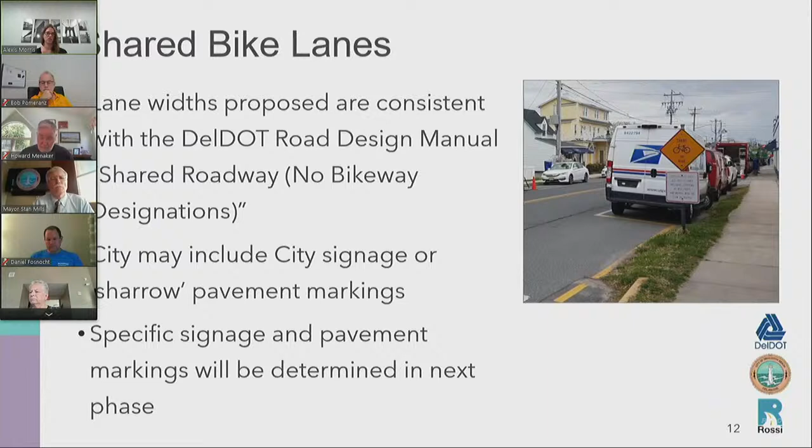The other recommendation we heard from the task force was for a tapered travel lane within the first block of Baltimore and Wilmington Avenue. We spoke with the project team about this, and it seemed the focus was really to increase views of the boardwalk and the beach. But tapered travel lanes would be in conflict with our goal to widen the walkways.

And then using turn lanes selectively - so our concept provides turn lanes where they exist today: southbound North 1st Street, northbound South 1st Street, and northbound South 2nd Street.

And then the treatment of the street ends. We had discussed previously a limited vehicle access zone or a pedestrian plaza, and really siting that within this area is a bit of a challenge. So what we considered was the existing and planned usage, as well as access requirements - so where parking lots and parking garages are - to determine feasibility and location for a limited access zone or pedestrian plaza. We'll talk about that in detail with our concept.

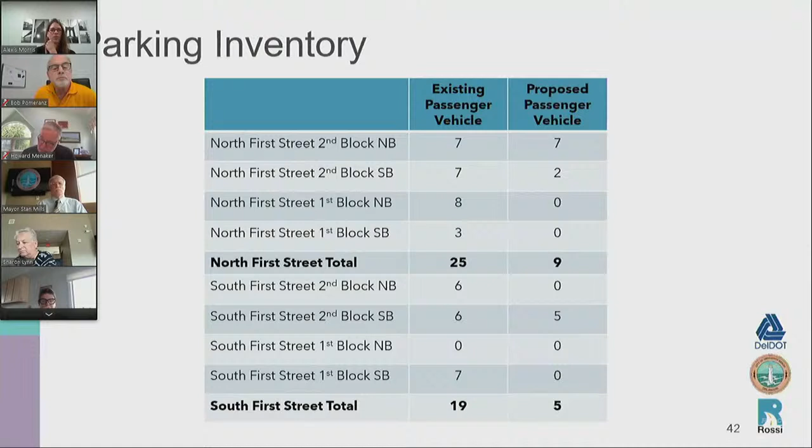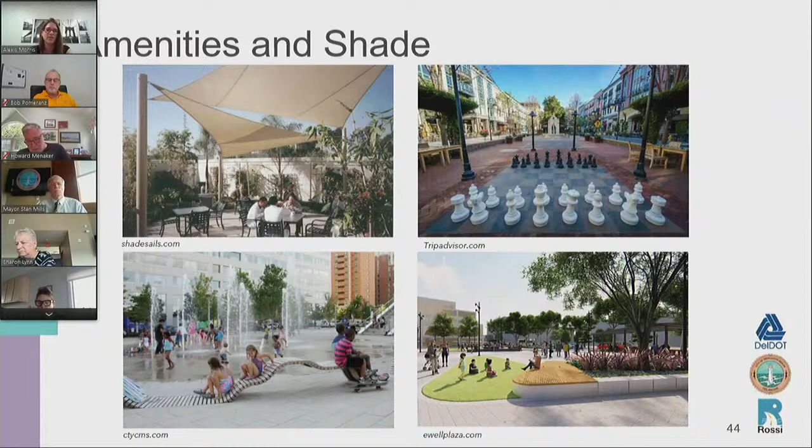Some photos I've shown here are really just provided for inspiration, if that's the direction the task force wanted to go in, if that's the direction the city wanted to go in. And then some vertical elements, whether they're tall features that can be seen from a number of blocks away, or smaller, understated features that still become iconic, known to Rehoboth—maybe everybody who visits wants to take a picture next to this memorial, whatever that might be.

So our next steps. Basically, this is our draft concept. We want to go ahead and get your feedback, and feedback from the city of Rehoboth to further refine this concept. Our next step will also include cost estimating and phasing, and then we would propose presenting that concept at a public meeting or workshop in September.

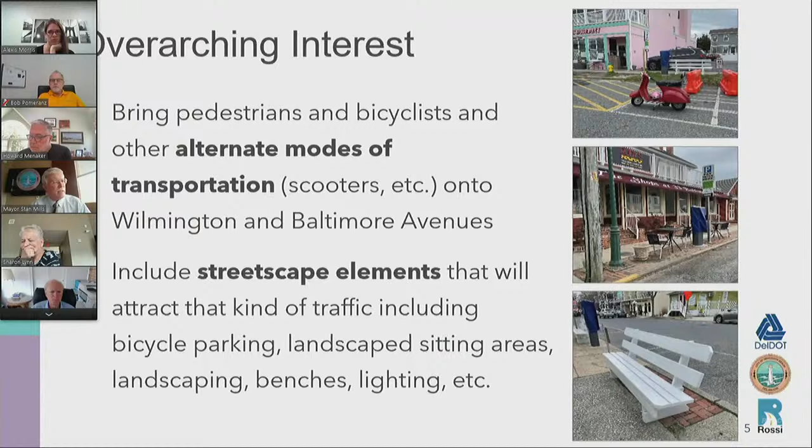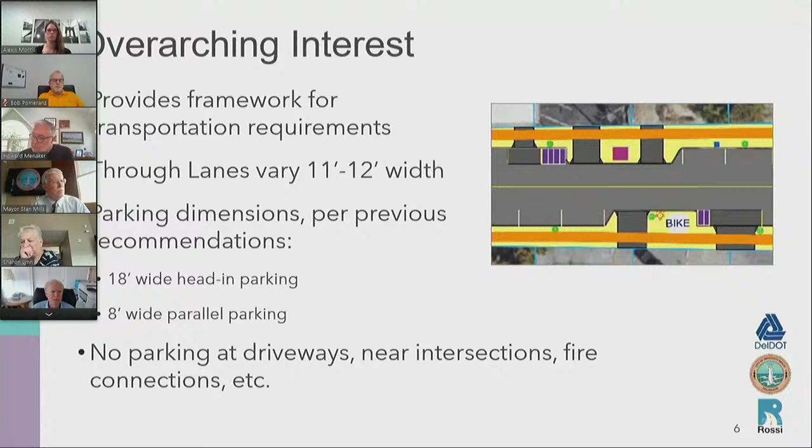All right, any questions? Hearing none, we'll go to the next slide. Any questions? I'm going to do this fairly fast, so make sure you speak up. Next slide, next slide. Overarching interest, this course mimics our guidelines. Next slide, overarching interest, again mirrors our guidelines.

Next one. PCP, I think, is also phencyclidine, hallucinogenic, but here it's pedestrian circulation path. I did want to further define building frontage. Help clarify for me, is building frontage only private property? Or can it also be a combination of private property and city property? Absolutely, it can be. So the building frontage zone, that's really just that space within which things might be set, but nearer the building side than the buffer side and outside of the pedestrian access route.

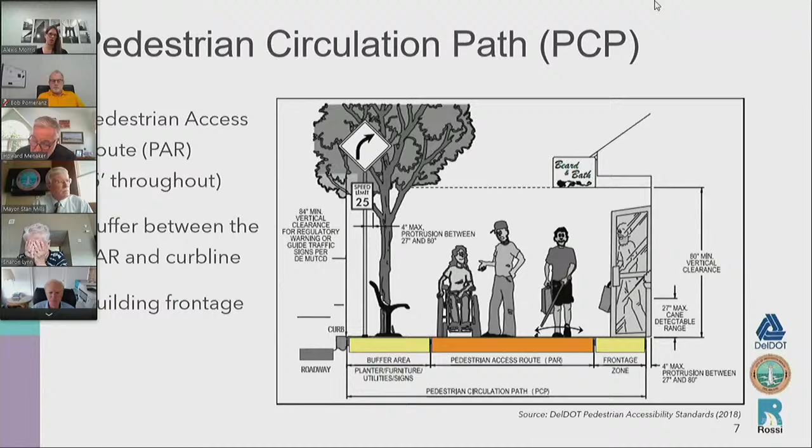That pedestrian access route, I think it's demonstrated a little bit better on our next slide. So the building frontage is that immediate space in front of the building. So maybe if the shop here wanted to have a rack with t-shirts for sale or something like that, that would be a feasible and acceptable thing to have in front of the building. But obviously that is outside of a pedestrian access route, essentially where your primary travel lane, for lack of a better term, for pedestrians is.

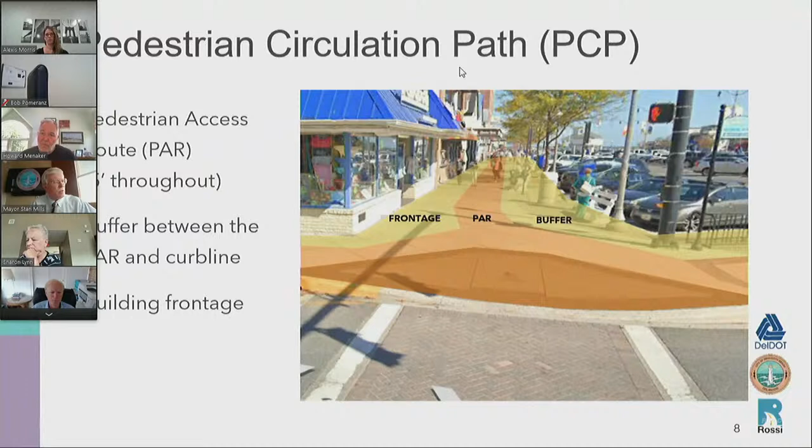So it's really just the area between the front facade of the building and the outer edge of the pedestrian access route, regardless, with no affinity for whether it is private property or public property. Okay, absolutely, all right. Any questions? If not, we'll go to the next slide.

Absolutely, absolutely. So essentially when you're walking on a sidewalk that might be in somewhat disrepair, sometimes you'll see that those slabs don't really connect. One might be sunken down lower than the other one. And that obviously interferes with access for all.

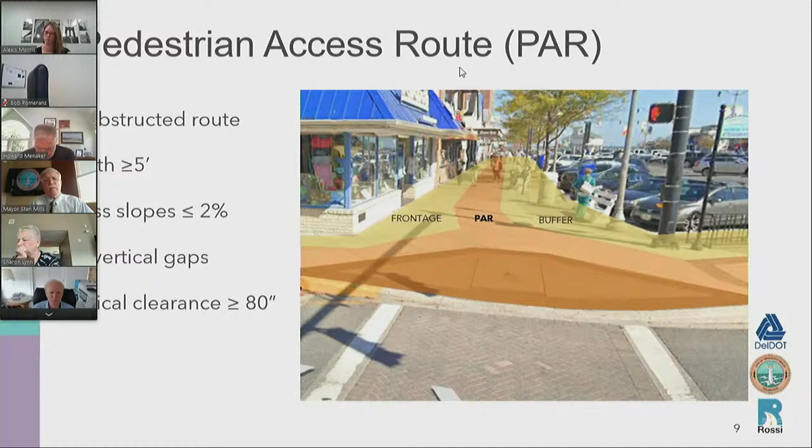Well, that segues into ADA compliance, I believe. Absolutely. Okay, any questions? No, next slide.

PCP elements. I had a question about the last slide shown. Yes, sir, Frank Cooper, go ahead. Frank Cooper, pedestrian access route.

This shows the PAR running into the phone poles, and I think this is interesting because what you've shown later in your proposal eliminates that problem, does it not? Isn't that the goal of removing that parking? Because the fact is there isn't enough room on this street for a PAR at all. It literally goes away. So I just thought it interesting to note the reality that the building access area on this street is...

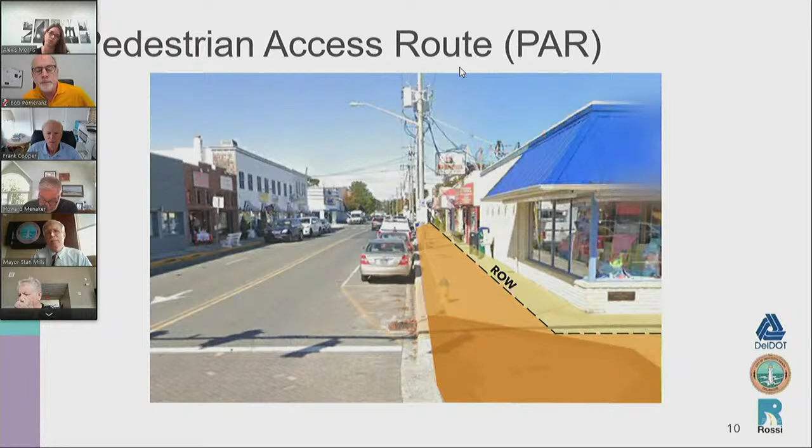...private property and could go away, as Ed Zanowski pointed out, since they could actually build out to that. So if we don't allow for it now, that could go away and we could end up with virtually no sidewalk if we don't address this. Thank you, Frank. Absolutely, and thanks for pointing that out. I think that's what we were trying to demonstrate with this image here. That's a good slide also, just to reinforce our desire to underground. Thank you, Frank. Next slide, PCP elements.

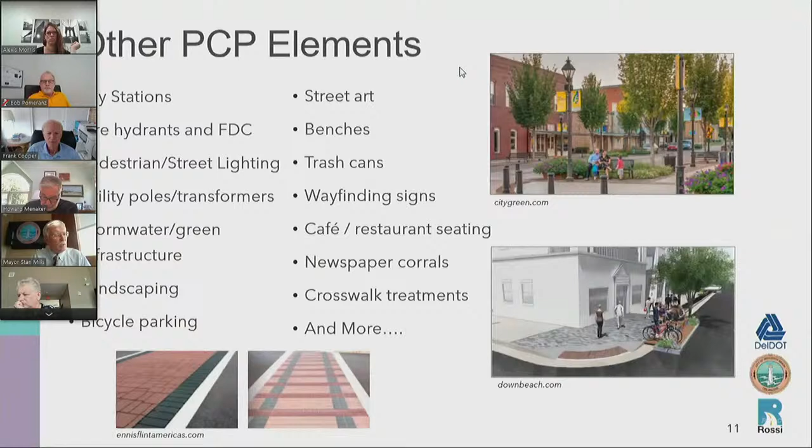The next slide is tapered lanes. I certainly have an opinion on that, and we voted to do that, but I think we'll address our thoughts on that again at the next meeting. That's the tapered travel lane. Are there any further questions here?

I made a note in my individual notes, and I said, wow, look at the number of aprons and driveways there. Yeah, they consume a lot of space, and that's just a statement. Any questions?

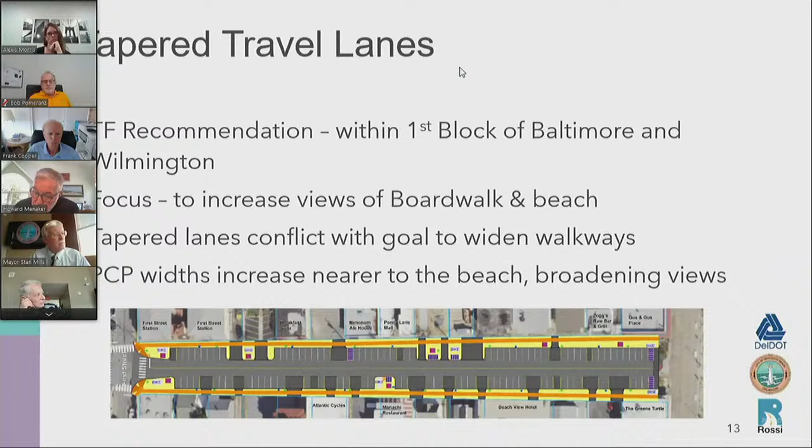All righty, U-turn lanes. Well, we went through that. This is exactly from our guidelines. Next slide, treatment of street ends.

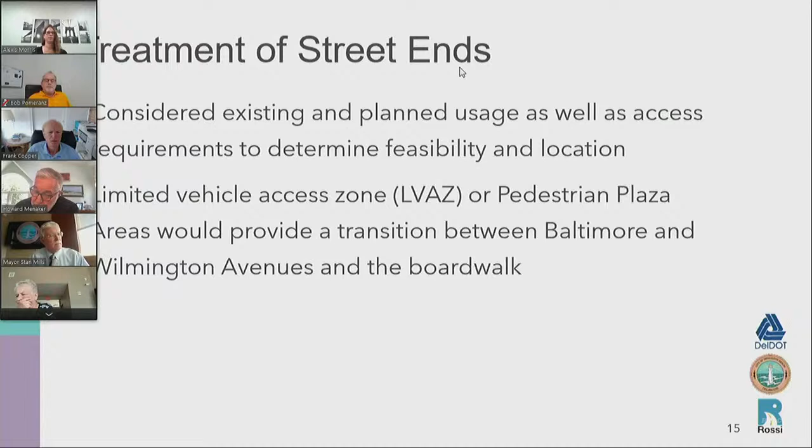Next slide, need for delivery and emergency vehicle access. I really don't have a question. I have a statement, maybe more, I don't know when it's appropriate, but...

...after the Lake Avenue Streetscape project, I am very leery of turn radiuses and using engineering programs to determine turning radiuses. Up in the Lake Avenue phase 2 project, we did that and actually had to take one curve out because it was not an adequate turning radius. So when we take this up at the next meeting, I'll probably bring that up and question it.

Are there any questions for this one? Yeah, Mayor? Frank Cooper. Yes, sir, Frank. Yeah, I question this too. I'm certainly in favor of the bike parking and whatnot, but I had a question about what is the minimum. In a practical sense, Mayor, you mentioned you had to take one out. I don't know what the federal standards or state standards are, but what has the city found? What did your people find was the minimum acceptable when you ran into problems before?

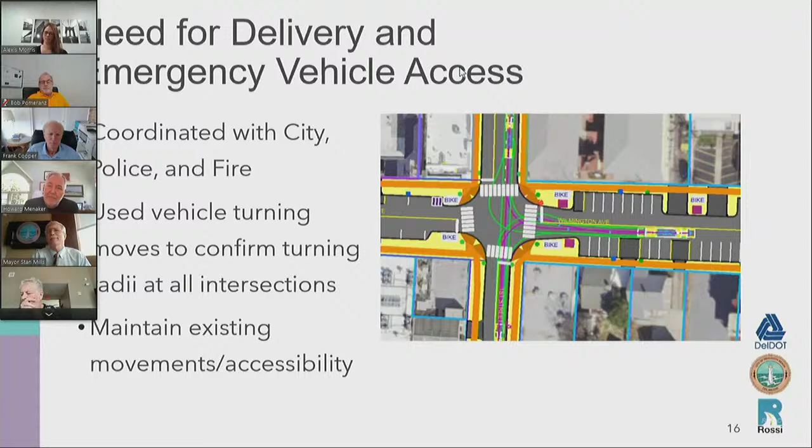The next slide is parking. Are there any questions? If not, we'll go to the next slide, South 2nd Street parking.

Okay, can I ask one thing about the last parking thing there? Yes. I had a question about scooter parking, just because of the shape of scooter parking areas. Is it acceptable to put those alongside restricted areas? In other words, areas in front of, say, a fire hydrant, marked off with yellow lines. Is it acceptable to use those as access to scooter parking so you could have scooters in, let's say, an angled parking space one alongside each other, four deep, and then use that same space allotted for no parking in front of the fire hydrant to be accessed?

Is that legal? Is that doable, Alexis? What we'll do, Frank, is Chief Banks here is making a note of all your questions and everything, and we'll address that as a bullet point at our next meeting also. Okay, thank you. Thank you. Anybody else? We'll go to the next slide.

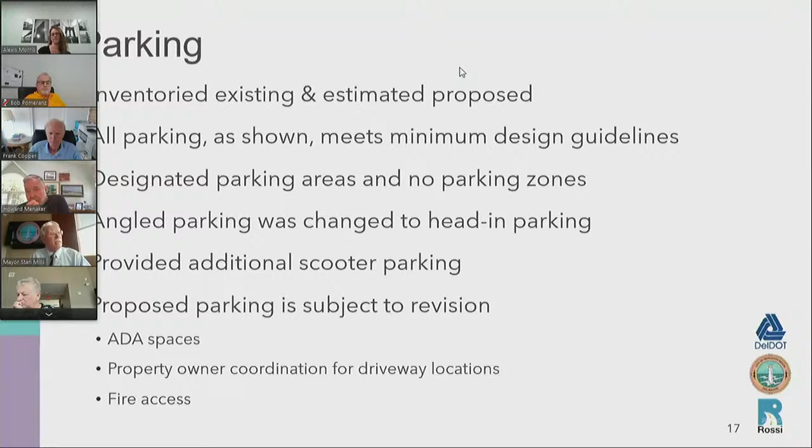South 2nd Street parking. I'd just like to double check what is the meaning of a striped shoulder. In other words, it's not a designated travel lane. It's not designated as a turn lane. It's a no man's land, which can be converted to a turn lane, can be converted to a travel lane, can be converted to parking, question mark? Yeah. Correct. Correct. Okay. Very good. Any other questions on this slide?

Yes, Frank Cooper. Alexis, when we were talking about this slide, she said, I'm paraphrasing, that as far as adding the parking spaces, there were no other parking spaces adjacent to this. Is that what you were saying? I can see the way this picture is that there are none, but prior to that, there are parking spaces, are there not, in the previous block heading south?

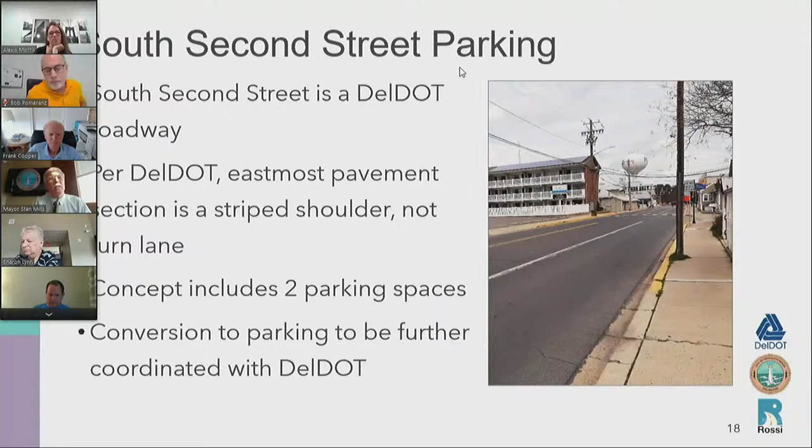Frank, hold on to that thought, because further down in here, there's actually aerials or diagrams of those blocks. So bring that up again, if you would. Any other questions on this particular slide? We'll go to the utility undergrounding. Let's pause for just a minute. Kevin Williams, would you be able to give us a quick status report? If everybody recalls, we've hired JMT, I think, as our expert consultant with undergrounding. You're working with them, I assume. Yeah, thank you, Mayor.

Yes, we actually met with representatives from Delmarva Power and JMT last week on site. They walked the complete site, all 4 streets, to get a feel for what would need to be done. JMT was able to get input from Delmarva on where tie-ins would need to go, that kind of thing. So they're in the data collection mode at this point. I think they're due to come back in 3 or 4 months with the report.

So what is their partnership with Rossi? Rossi, we know, is not really getting into the undergrounding other than the minimal information they're providing here and some guesstimates of locations of transformers. Is JMT eventually going to partner with Rossi, or are they just going to do their own thing? At this point, I think they're just doing their own thing. It's not in their scope right now to coordinate with JMT, although they have some history together. They have spoken as to what each are doing, but it's not in their scope right now to do any direct coordination. All right.

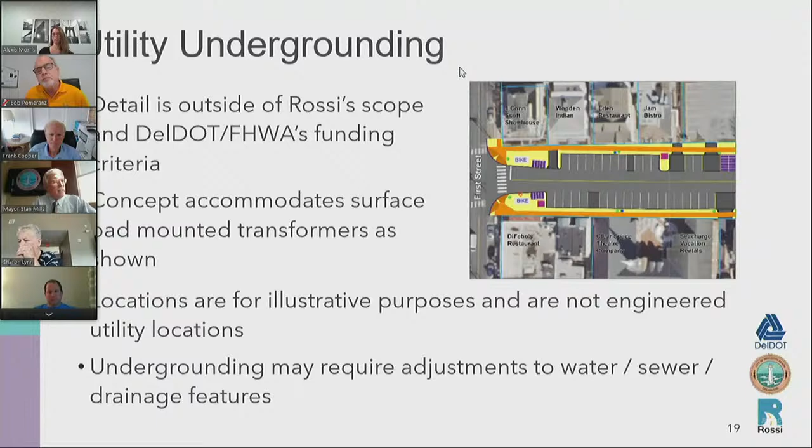Thank you, Kevin. So the point is for us, Rossi's trying to give us some ideas, but the definitive ideas on undergrounding will come from JMT at a future point. Are there any other questions on utility undergrounding? If not, we'll go to the next slide. Stormwater management. I think, Joe Baker, you were mentioning the flooding incidents at your place.

We're going to need to meet with you, and frankly, I think we're going to have to reach out to all the businesses in our project area to advise us if they have any flooding incidents that we need to be aware of, because we're out there, but we're not necessarily cognizant of every situation where it's flooding. So we'll reach out somehow to everybody. Yeah, that sounds great. Thank you.

I had a question. What are tree pits? Tree pits are just those areas where you have trees planted within the pedestrian circulation path, for lack of a better term. Okay. Are they lined pits designed to retain the tree roots so that they don't upheave the sidewalks? There's different ways of doing it, and that would have to be a consideration in final design. Good. Thank you.

Frank, you all right? Yeah, that's what I was wondering. I had talked to a landscaper about just that, because of the objection some people had about trees elevating the sidewalks and causing disruption, and what the alternatives were. And I was wondering whether these tree pits are in fact that.

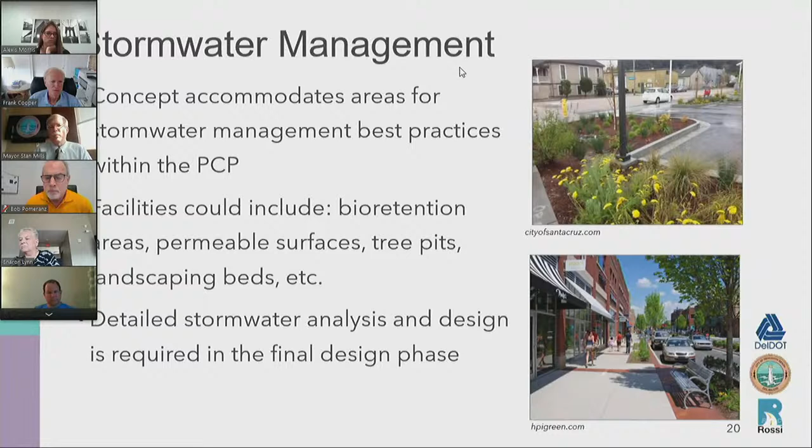So they can be, in other words, is the answer there. Great, thank you. I want to pause just a minute and let members of the public know that after we get through this second set of slide review with our questions, we'll call on the public at that time. So we're not forgetting anybody.

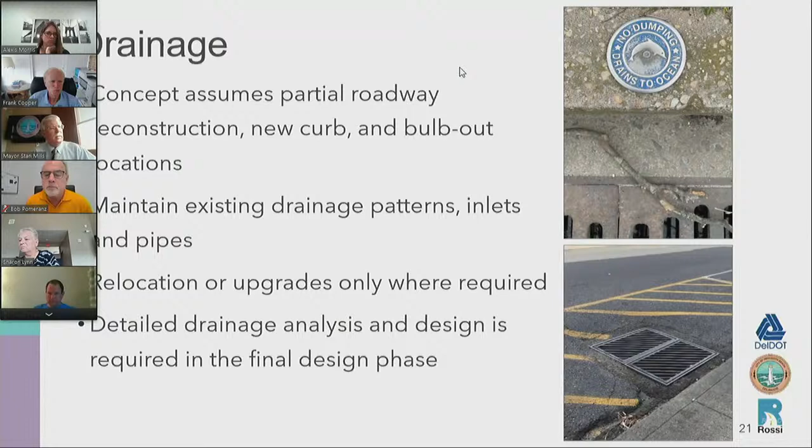Next slide is drainage. I think I already addressed that. Beach patrol and restroom facilities. I think we're pretty close to the point where, Kevin, are they going to do a couple elevations or something? And then we would be able to share those with you all. I think though it's important to address, maybe even right now, that we have an existing restroom building. We have an existing beach patrol building co-located with that. Those are not going away.

What we're planning on doing is renovating them, adding a second floor to it for the beach patrol building. That allows us to expand the first floor restroom facilities for the men's and women. It allows us to expand the first floor area with family restrooms and also changing rooms. We don't have any other way. I mean, the idea would be that if we had city property elsewhere, we could relocate everything and have that entire end of the street open like we do at Wilmington Avenue.

But the reality is we don't do that. We can't do that. We can't buy the Grotto building next door for $3 million and put our restroom facility there and our Beach Patrol there. The Beach Patrol, they're in a strategic location. There are no other locations that can go. So we have to work within what we've got.

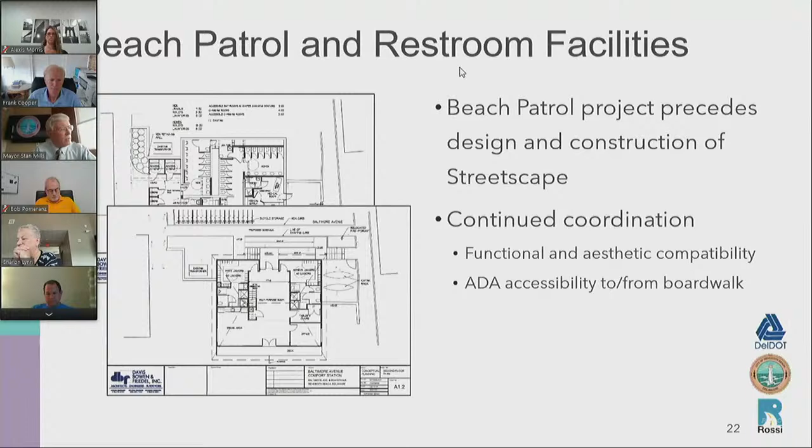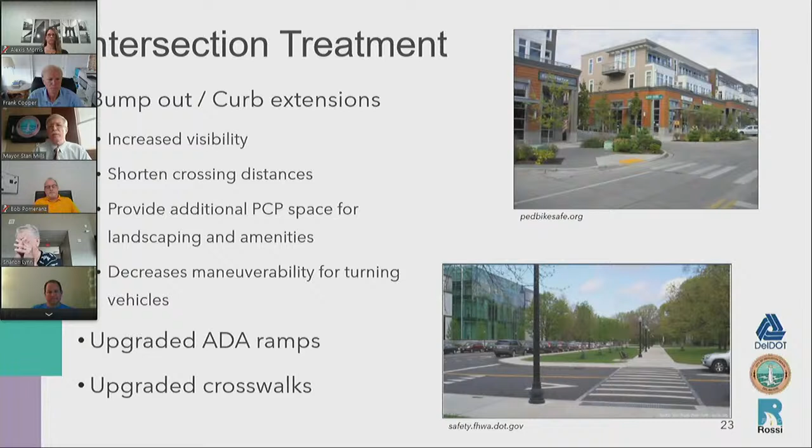Thank you. I think there's time to integrate both projects, Frank and Howard. So, any other questions? Next slide is intersection treatment. Seems self-explanatory. I think there's some discussion points for next week. Any questions? If not, we'll move to the next slide, where we're going to go into concepts. Baltimore, first block.

Does everybody understand the orange line there? That is a minimum 5 foot clear, I'm going to call it sidewalk, if you will, pedestrian access circulation area. And then the yellow identifies areas outside that 5 foot minimum. I just want to make sure everybody understands that concept. And then within the yellow, they're saying that's where you can put amenities or bike racks and everything. I have some comments for it next week, but I understand the concept. Does anybody have questions?

Mr. Mayor, I think the only thing to make sure is clear, in your clarification: the sidewalk itself can extend into the yellow area as well. We are not intending to imply that it is a 5 foot wide sidewalk throughout the project area, but rather that sidewalk can be variable within the yellow area. It's just the orange is its minimum. And again, that alignment too can shift left or right, depending on whether Amuse would prefer to have a little additional space in front of that area, if that's a desirable space, or some other suggestions such as that.

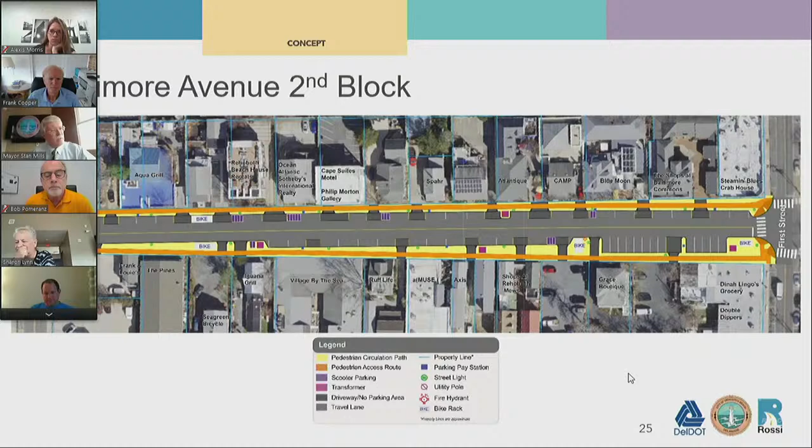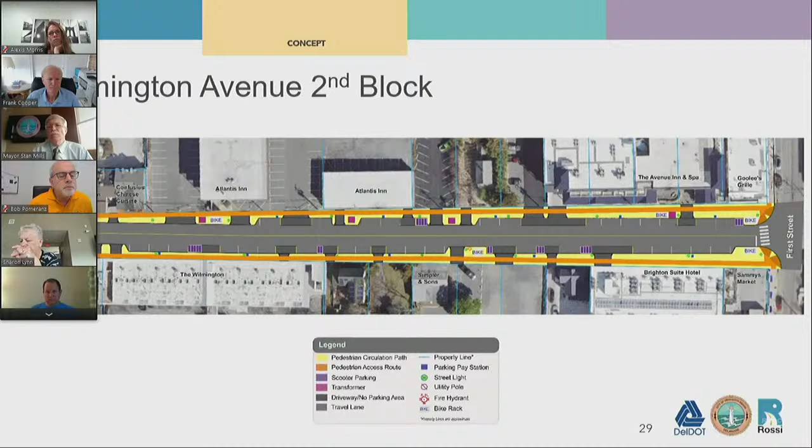The next one is just showing what Alexis indicated is a concept. Could be used here, could be modified, could have a whole new concept, but it's indicative of a gateway type feature near the boardwalk. The next slide is Wilmington Avenue, second block. Everything we talked about Baltimore, I think, is applicable here. The next slide, first block. Again, this is a non-tapered, and it shows you the proposed sidewalk layout, the minimum 5 foot width, and that there's plenty of extra area beyond the 5 foot minimum, especially in the easterly end of the street.

No questions. We'll go to the next one where it shows one type of design for the limited vehicle access zone at the end of the street. I had a question, Mayor, and it's probably for you. If you had a limited vehicle access area, could that be used for something other than one of these park-like things? Could it be like kiosk space that the city rented out for pop-up things, for a sidewalk sale, or a snowball stand that somebody wanted to have for a week or two? Is there some possibility for some attraction and revenue for the city out of that?

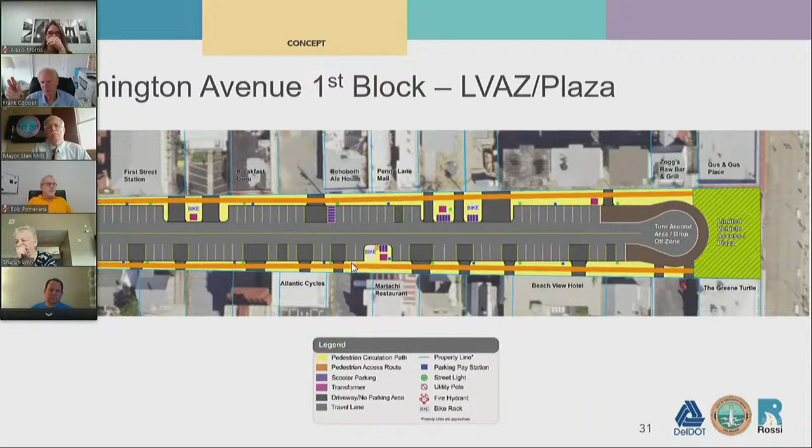So I guess what I was talking about also was the slide two previous that had the park-like area with trees and whatnot. Yeah, that. So go back one more. In fact, oh, that's perfect. That's kind of what I was thinking of, limited vehicle. Go back one more, Alexis.

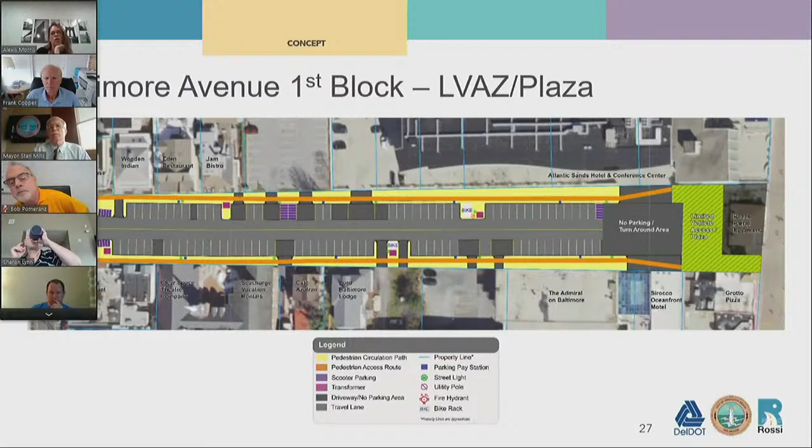So there you've got it identified as a limited vehicle access area. But it's incongruous with the next slide. So go back to the next slide, which is kind of a park area. You wouldn't have vehicles parked in that area. Yeah, that's why I assumed, sorry.

Yeah, I think that's one of those things that could be determined by the city as something that's a little more accessible, more desirable than just a strictly pedestrian type area. But our idea being that these areas would be flush with the ground, with removable bollards, so feasibly you could get vehicles back here if needed, but it would not be where vehicles regularly are accessing. A lot of that's based on the fact that the way we've sited these at the far ends of the streets, outside of where driveways and access to garages and parking lots is required, there's really no specific need for vehicles to regularly access these areas.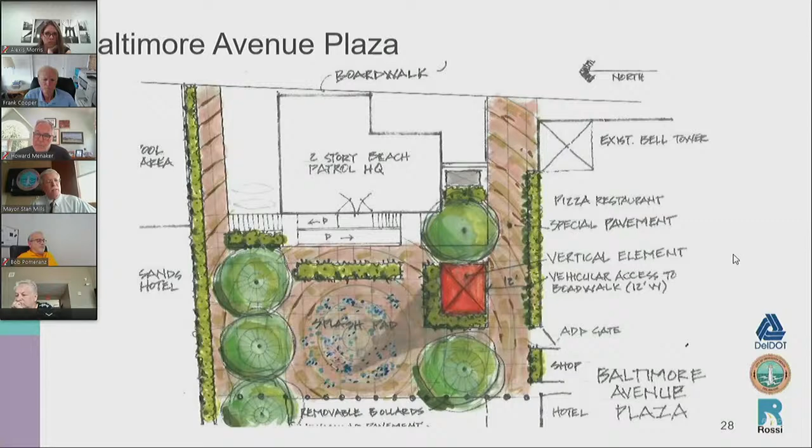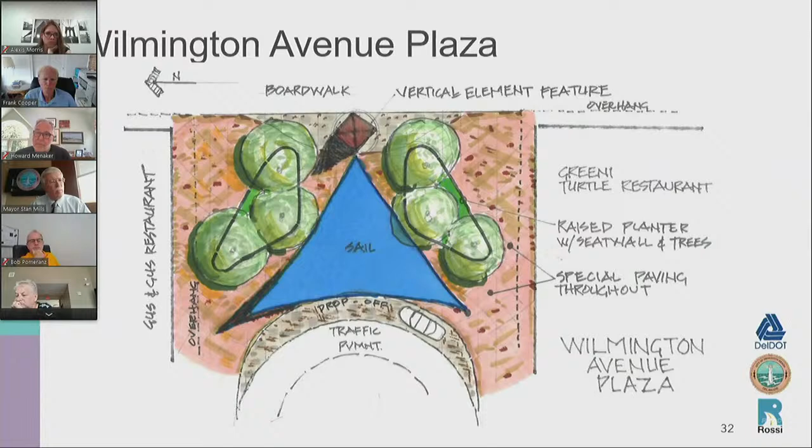Thank you, Howard. Any other questions? We'll go to the next slide, and the next slide. So here's a kind of similar concept that was done for the end of Baltimore Avenue.

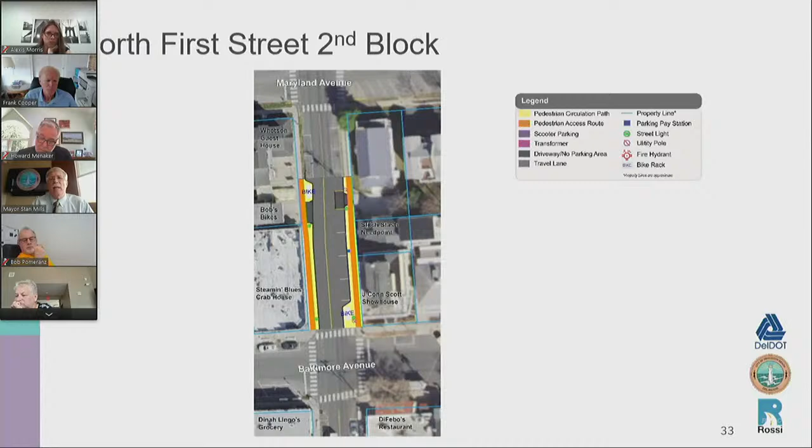Next slide. North First Street, second block, shows their one plan there. Any questions? Again, it's debatable, but that'll be for the next meeting. Next slide. I want to make sure everybody understands the red.

So, this is Patti Hofman. Looking at these North First Street blocks, it looks like you're eliminating parking. You want the previous slide? All of them are fine, we can stay on this one. If you look at North First Street, from all four slides, the one we just saw and two more coming up, it looks like they're eliminating all parking on North First Street, which, if I'm not mistaken, is about 41 parking spots. And I'm not supposed to give opinions right now, but wow—you've eliminated all the parking on North First Street, except for 4 spots between Baltimore and Maryland.

That's a lot. Well, again, we're going to debate it at the next meeting, Patty, if you don't mind. This is not the opportunity to do that. So I hear you, and I understand that. I just want to point that out so everyone can think about that for the next meeting.

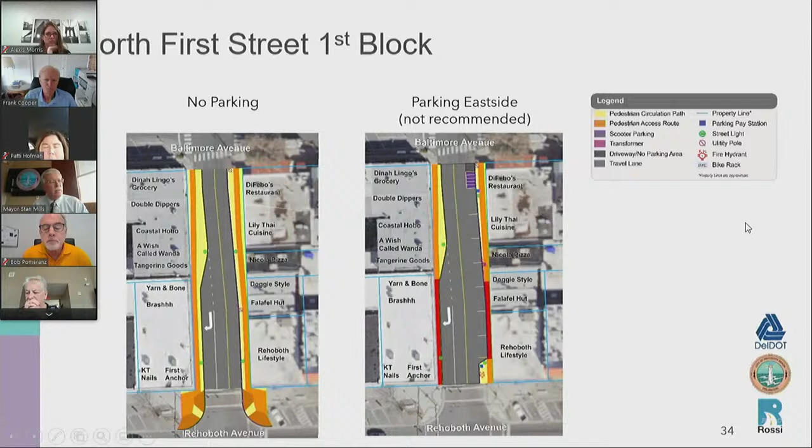No questions? Yeah, we'll go. Well, I guess, all right, I'll save it for next meeting. I just have one general question.

For David, on the buffer areas, do we have a sense of whether the trees we currently have fit into those buffer areas, or if trees would need to be replaced? Second question, probably for Rossi: if a tree that is not on city property is causing buckling of the sidewalk, can that be accommodated in the sidewalk design, since I know there's a priority that the sidewalk stays even? Or would trees currently causing buckling need to be removed?

Your first question we addressed about two meetings ago, when we indicated that the trees in the streetscape project area very well might succumb to this project, because trying to design a project to accommodate the existing trees is very challenging and not likely to end up in a good result.

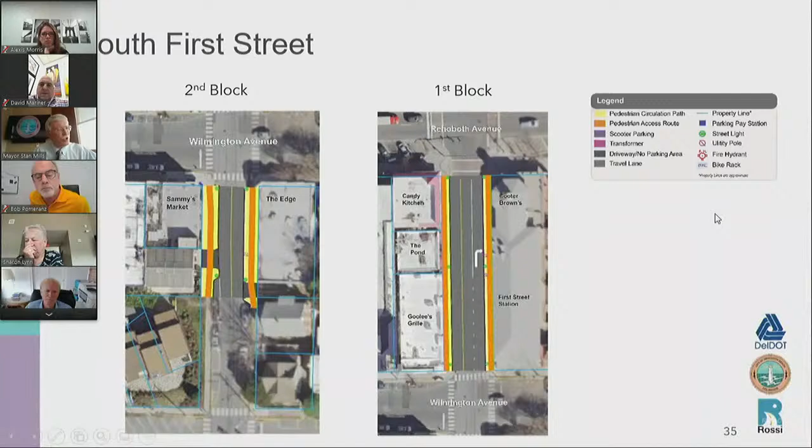Frank, can you remember your question from ten slides ago? Frank Cooper, you were talking about the left slide, I believe. Right, the area on South 2nd Street from Wilmington to Christian or Delaware, the lined shoulder or whatever they called it.

It seems to me that in the blocks south of this, there is parking all along that street. So I don't think that if they put two parking spaces there, they'd be sticking out or the only ones in the area. It's currently used as a right turn lane that's excessively long. I've looked at it carefully over the last few weeks, and I've never seen traffic there back up and use that. So right now it's just wasted space, and as we're looking at removing parking in other areas where we need the space, any opportunity to add parking, we should look at it.

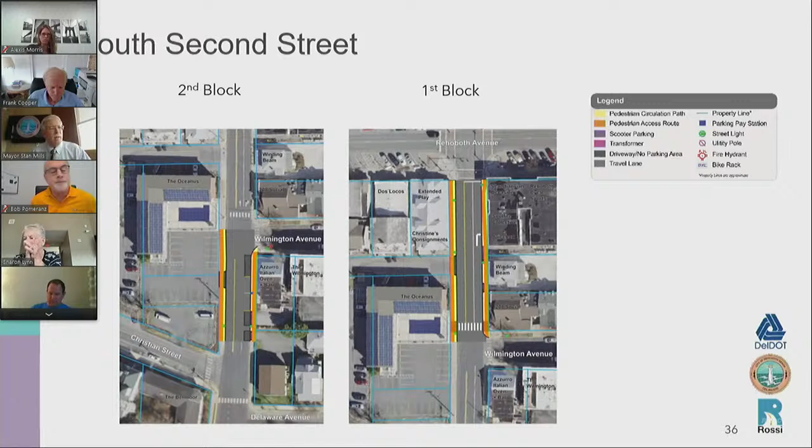All right, well, we'll put that on for discussion at the next meeting, when you share your opinion on that and we'll get into that discussion. If there's no other questions on South 2nd Street, we'll move to overview of intersections.

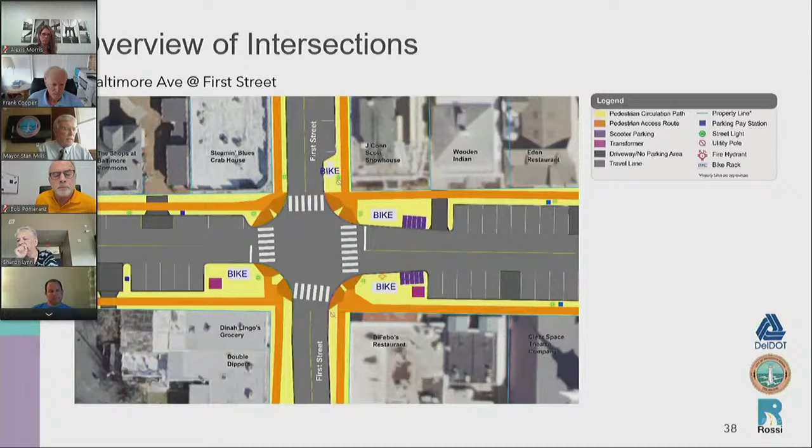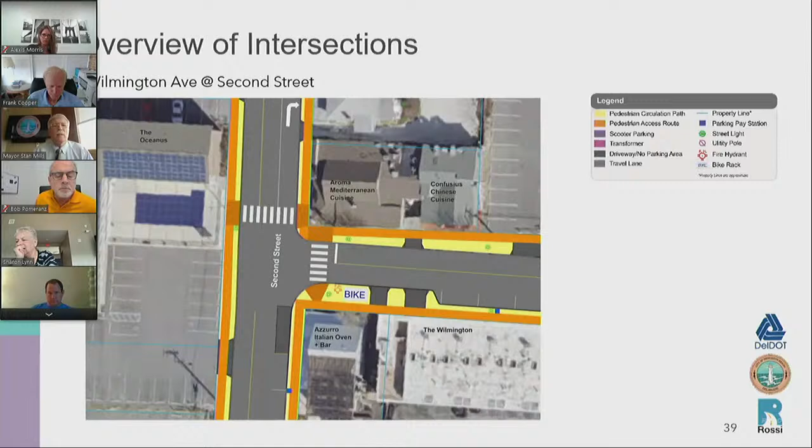I think we can go through these quickly, as we'd likely have a bullet point to discuss them next meeting, since we've already identified turning radiuses and opinions from the fire company, beach patrol, police department, etc. Are there any questions on that one, or the next one, or the next one? I have a question here.

I see parking spaces counted for vehicles and scooters, but not bicycles. And in the previous slides there's been a lot of additional bike parking, but I don't see the counterbalance here of, we've lost X number of vehicle parking spaces, how many bike parking spaces have we gained? Is there any estimate of that?

Frank, we didn't estimate those areas because there's not a standard for how many bikes can park in a specific rack. Additionally, based on conversations with the city, bike racks are proposed in locations that could feasibly be moved within the pedestrian circulation path. So, to actually quantify it in the same way it's quantified here isn't feasible, but you're exactly correct—we've certainly expanded, in our sketch or concept, where bike parking would be provided.

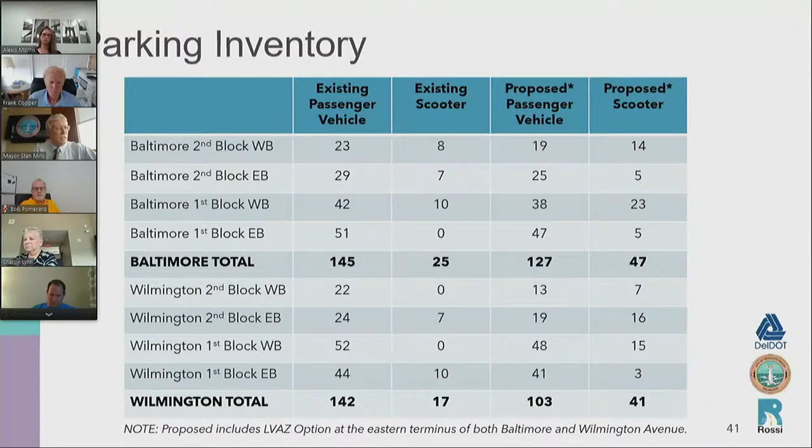Anybody else? If not, we'll go to the next slide, and the next slide is amenities. We're not ready for amenities. Vertical elements is an amenity.

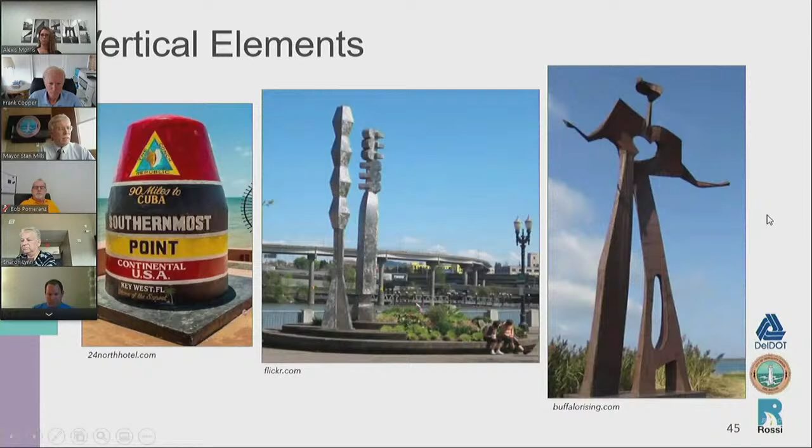Next steps. I would like to share with you that our next meeting is August 4th. That's where we'll resume this, and that's when we'll get into a discussion of each point that we need to resolve. I've also put on the calendar August 11th as our last meeting on this topic, if needed, we would meet then. It was possible we could finish August 4th, but if needed, August 11th, because that keeps us on schedule with giving Rossi feedback on this concept introduction before August 13th, which is their deadline.

A reminder that what we are headed to is giving them feedback, having them do some refinements, and then we're headed to a public workshop where we invite the public, invite neighbors to this project, invite all those with businesses within the project area to come and look at and critique and hopefully compliment us on some of our work there. So that is coming up.

I want to thank everybody for trying to stick to the questions and not the opinions. It's hard to do because I know we've each got opinions, but this will give us all an opportunity to have a week to contemplate more.

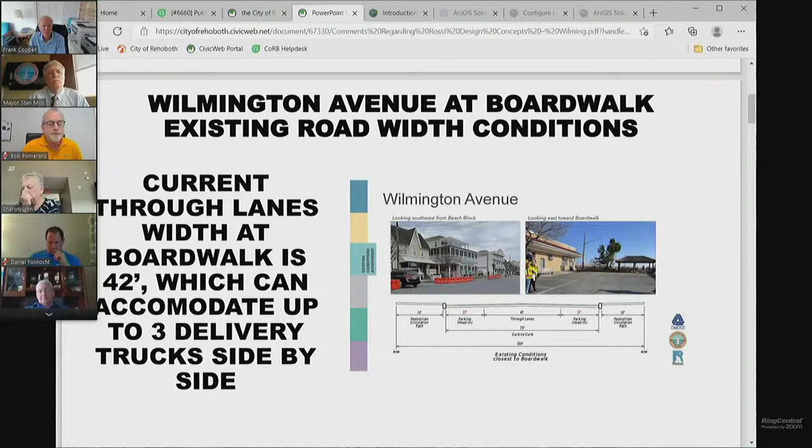Max, if we can go to the next slide, please. I believe what I was briefly trying to state here is the issues with regard to public safety and delivery trucks. As I see it, in my first slide here, I noted that the through lanes currently at the east end of Wilmington Avenue are at 42 feet. This can accommodate 3 delivery vehicles side by side. Next slide. Here's a photograph example of the 3 vehicles side by side and the importance of having adequate through lane width to accommodate for this. Next slide.

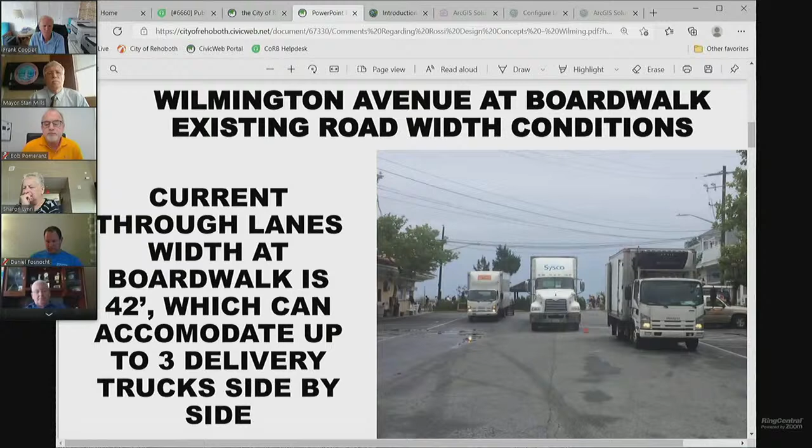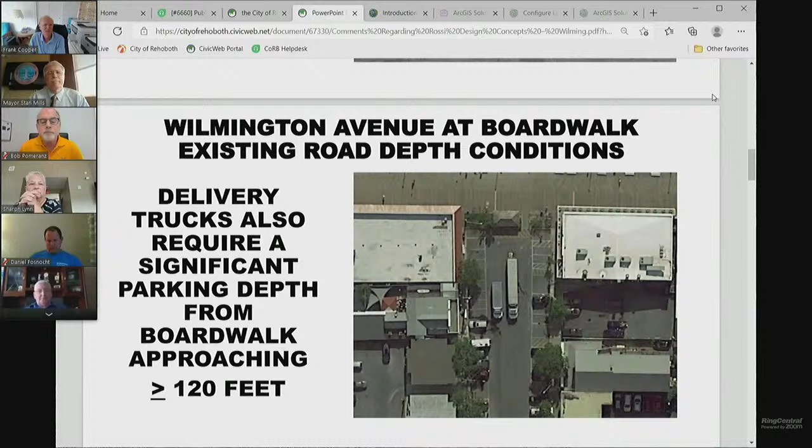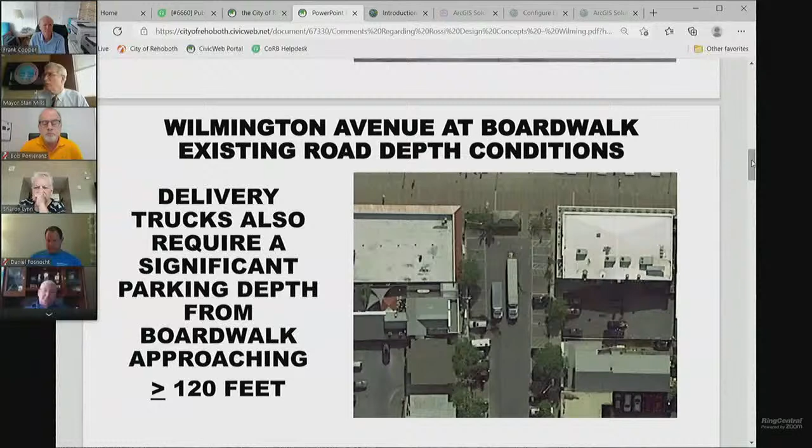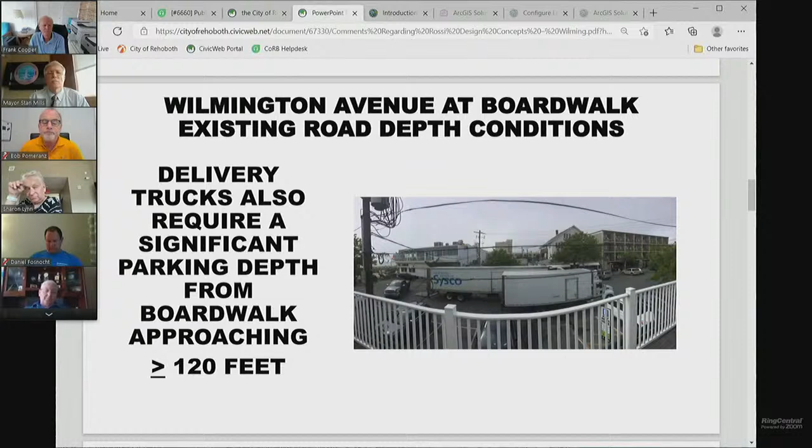The next two slides show panoramic views of these delivery trucks and how they park on various days. And here again is another photograph to show you how they literally stack themselves when they make deliveries.

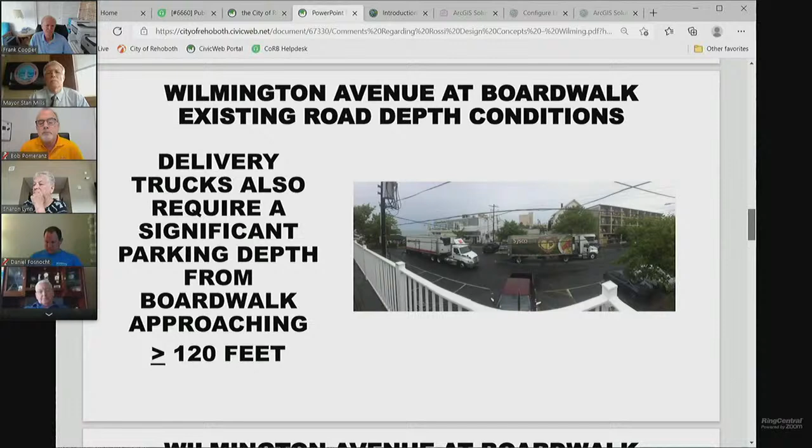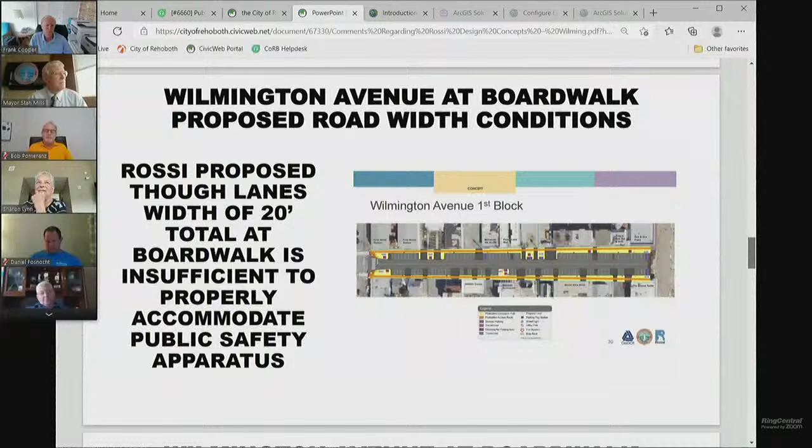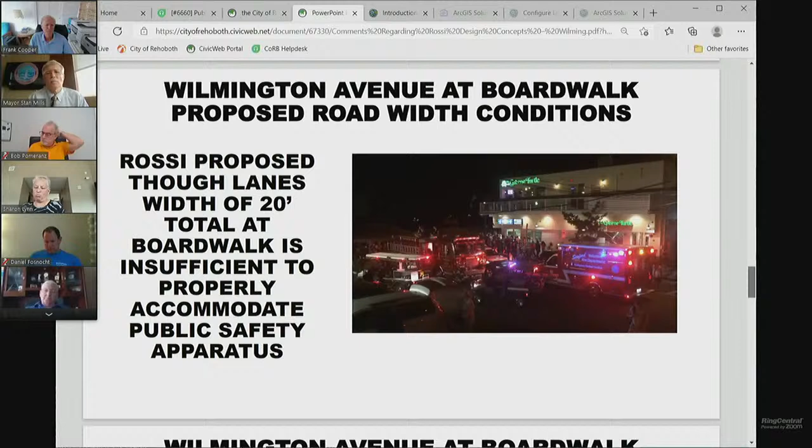Therefore, the concern that I have raised is that Rossi's proposed through lane width of 20 feet total at the boardwalk clearly is insufficient to properly address the necessary vehicles that need access to that east side. Particularly, public safety vehicle access needs adequate width at the end of the boardwalk, which truly exceeds that 20-foot minimum being proposed at this time.

As you can see here, the 20 feet that is proposed would be insufficient to allow for both delivery trucks and private vehicles to access that east side of Wilmington Avenue.

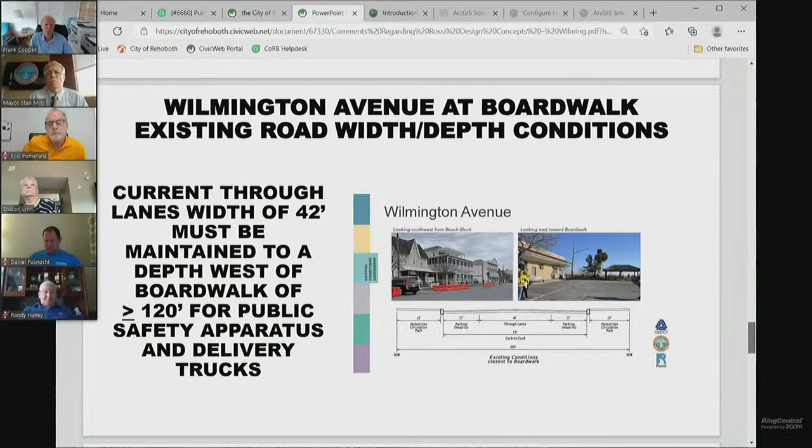Therefore, it is my proposal that we need to continue to maintain the current width of 42 feet at the east end of the boardwalk, along with a depth of at least greater than or equal to 120 feet, to adequately provide access for public safety vehicles, apparatuses, and delivery trucks.

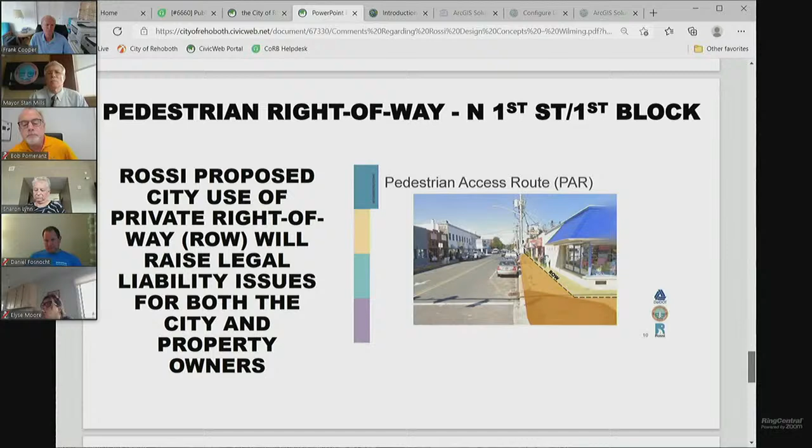Briefly, I believe Rossi has addressed this appropriately, but I raise the concern that the way the diagram has been drawn, it imposes upon the right-of-way of the private property owners on North First Street's first block. Therefore, any utilization of the city's use of that private right-of-way also raises legal liability issues for both the city and property owners.

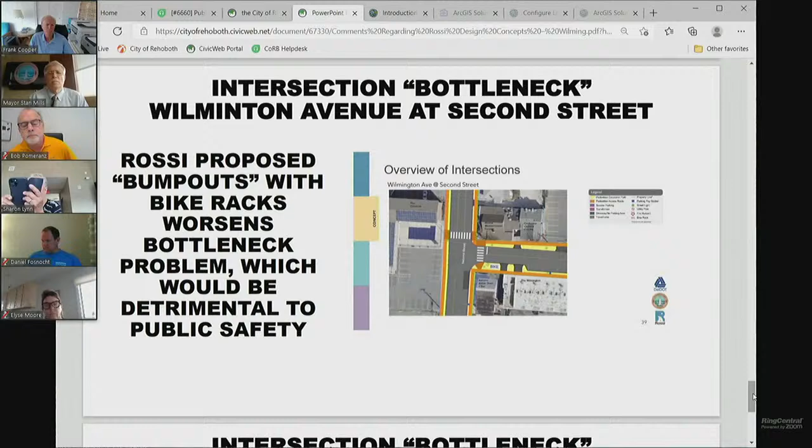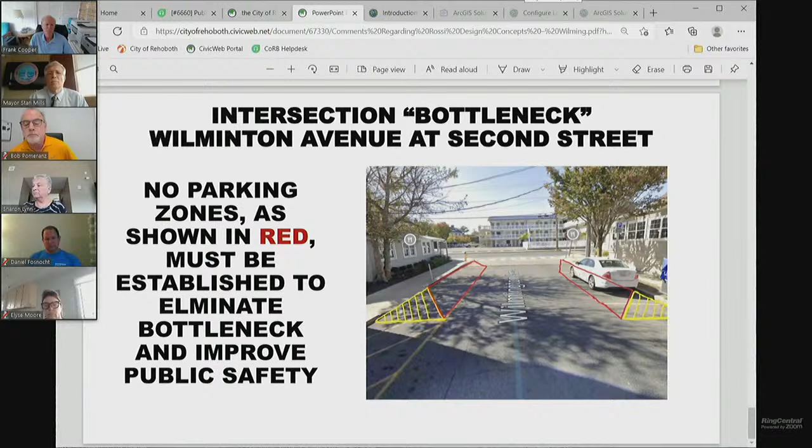That completes the slide presentation. Mayor, one final note: that same bottleneck problem is occurring at the intersection of Wilmington Avenue and First Street, at the entrance to the second block, where you have the Avenue Hotel and establishments along there. Many times delivery trucks park at that intersection, and again Rossi is proposing additional bump outs with bicycle racks at those locations, which would again impede the ability of proper delivery of these trucks to the customers they serve in that region. Thank you, Mayor, I'll stand by if anybody has questions.